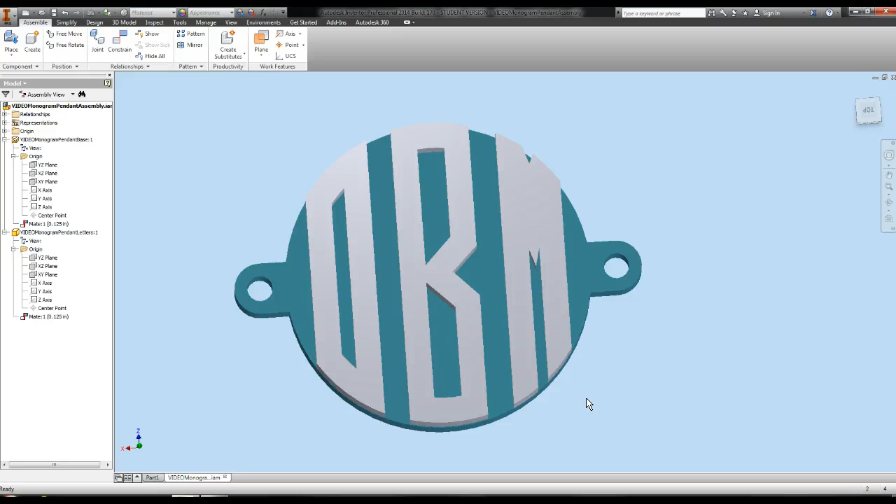My name is Danny, and today I'm going to be showing you how to make the letters for this monogram pendant piece. And what I'm actually going to do is just show you how to make the first letter D here and how to set up the proportions for these letters, and not do all three, because I think after I show you the first one, it's really just about playing with the line work.

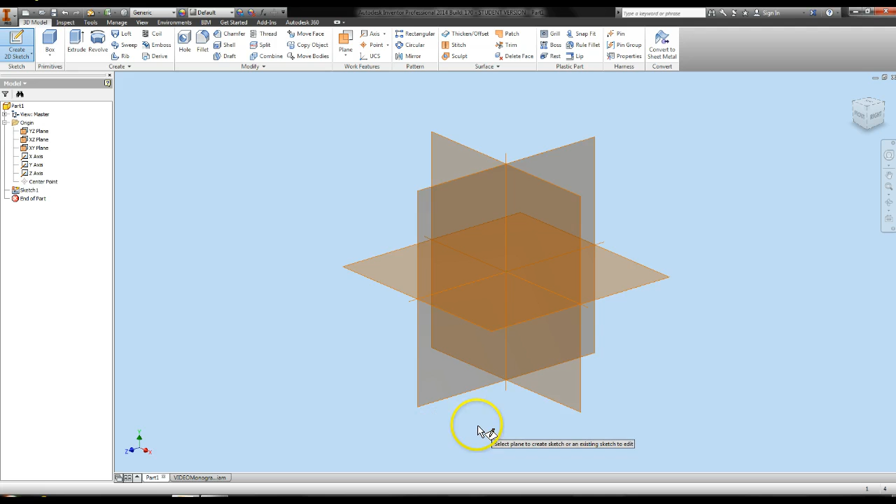So I already went ahead and opened up a new standard part. And then I'm going to create a 2D sketch, and I want to make sure it's on the same plane that I made my circular base on, which was the front plane for me, but whatever plane you used is what you're going to want to go with.

And then I want to create a circle as a construction line that represents this circular base here, so that I have a reference, because as you can see, these letters fit perfectly around the edges of the circle. And then I'm also going to create an inner circle as a reference, because that's what this edge here and here follow, so that we get this uniform thickness throughout all of the letters.

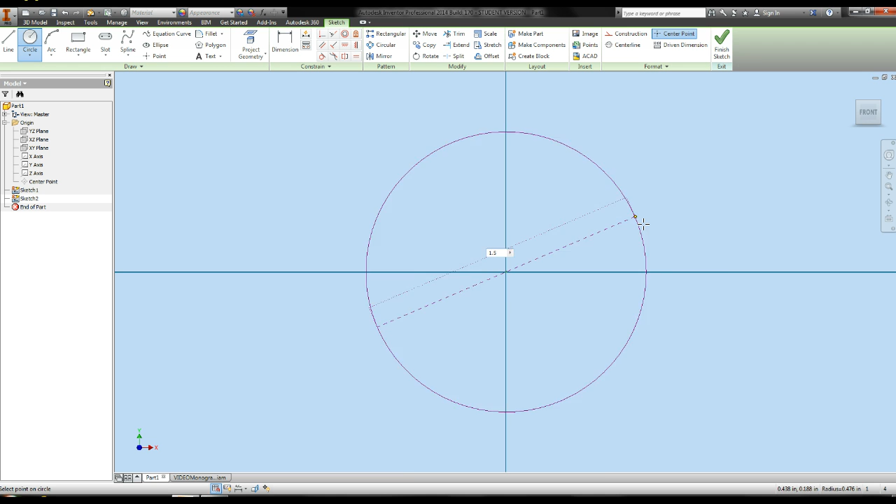So what I'm going to do is first make the outer circle, which if you watched the video on how to make the base, you'll know to be 1.5 inches. I had selected circle center point and selected the origin, and now I'm just dragging out and typing in 1.5 and just press enter. Then I'm gonna zoom out so you can see that entire thing there. And then I'm gonna press escape to get out of the circle feature, and I wanna offset this inward.

So to offset, you go up to modify and you just left click offset once. And then you select the shape that you'd like to offset, so I'm gonna select the circle. You don't have to hold down a left click, you just have to left click that circle once and then move your mouse. And I'm just going to move it in, not to any specific place, because I'm going to dimension that anyways. So I'm going to press escape since I'm done offsetting, and I'm going to dimension those.

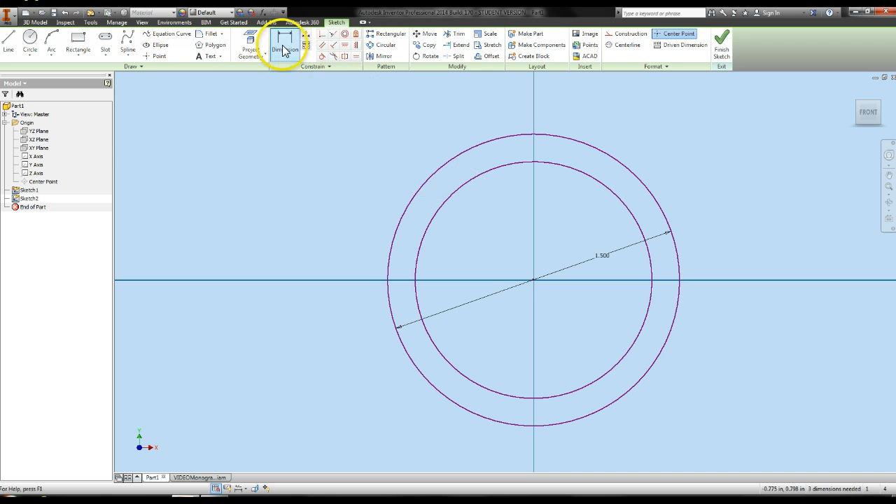So I'm going to click dimension, click the outer circle, click the inner circle, and as you can see, it knows that I'm trying to dimension the distance between those two. So the distance between the two circles is going to be 0.125, just so that we can use some standard fractions. So now we're going to escape out of the dimension, which I already did, and then we're going to make both of these construction lines, since they're not actually a part of the part we're creating.

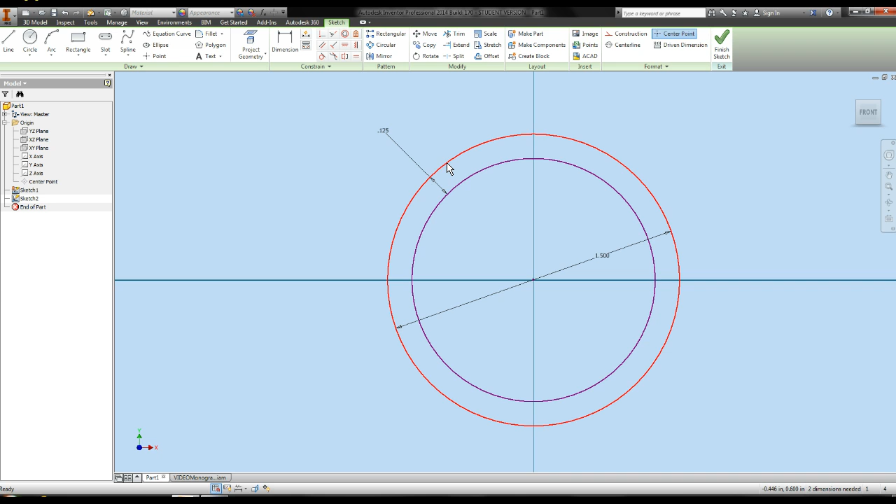So I'm just going to hover over the outside circle, and as you can see, it's going to highlight red. You're going to want to right click that once and then select construction by left clicking, and then we're just going to repeat that with the inner circle. I want to make that a construction and then press escape and then make this one a construction. So you can't just do it all in one go.

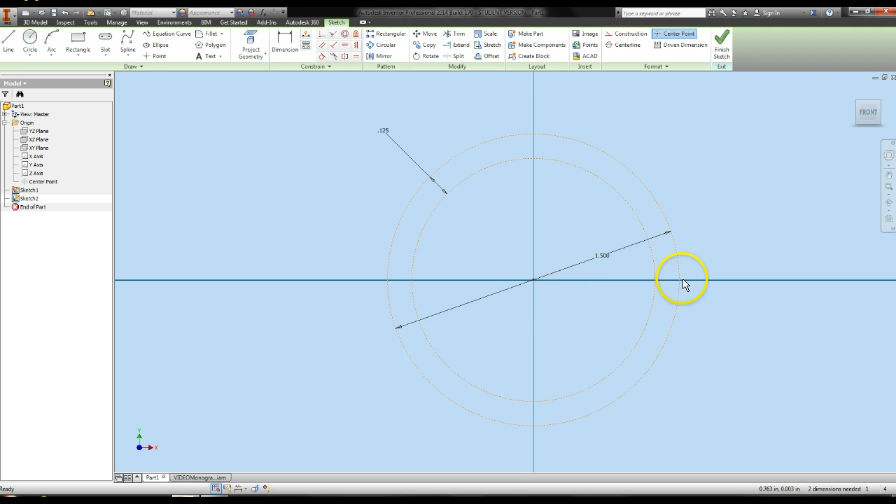So now we have two construction lines, and we're going to create some vertical construction lines to split the width of this circle into three equal pieces in terms of the width that we're allowing for those letters. So since this is a 1.5 diameter for the outer circle, we're going to create vertical lines at the x coordinates of 0.25 and negative 0.25, because that's what's going to give us that equal width.

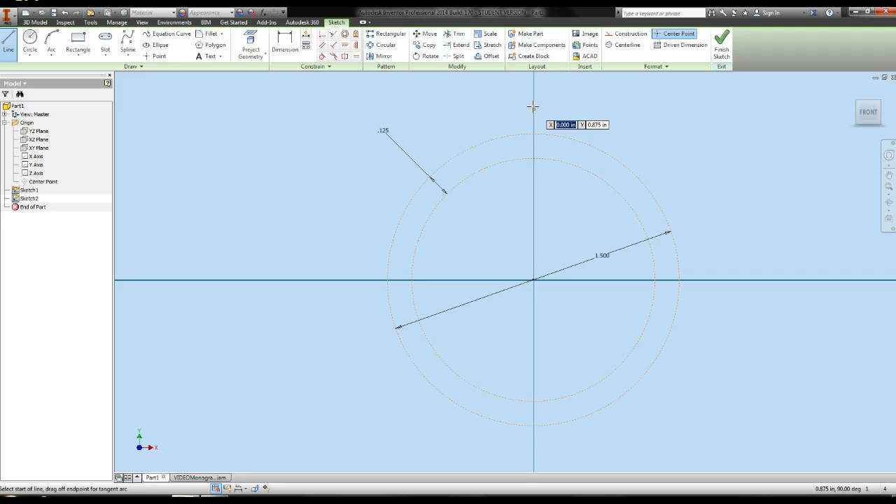So I'm hovering over the origin, and I want these vertical lines to come up out of the circle and just slice through like that. So I'm hovering up here. As you can see, the x-coordinate's at 0, and I'm just going to press tab and type in 0.25 and press enter. And as you can see, it splits that up for me. And sorry, I'm zooming out. And I want that to be a 90-degree angle there, and then just bring it down somewhere, it doesn't really matter, past the edge of the circle on the other side.

And then you're going to press escape and do the same thing, hover over here, and then press tab and make it minus 0.25. And again, just drag down, have the 90-degree angle, and there you go, and press escape. And again, we want to make these construction lines, so I'm going to right click, select construction, press escape, right click, construction, escape. Okay, so now we have these three equal portions.

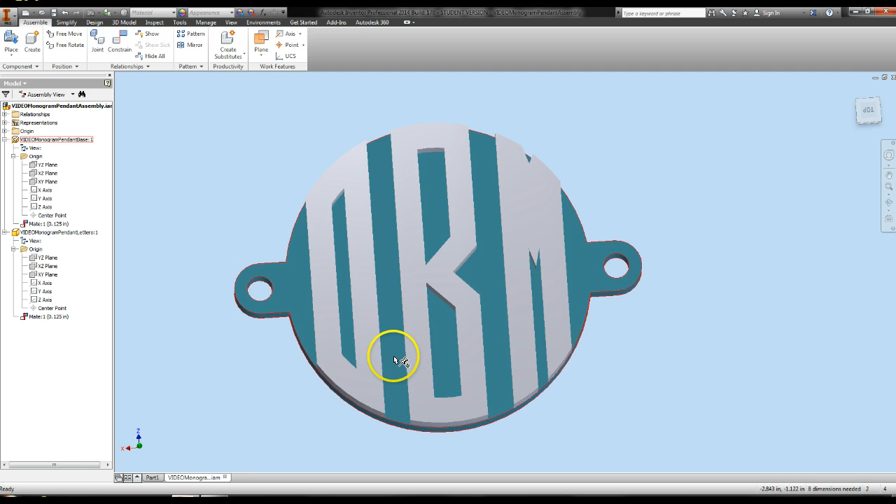And now we're going to work on making the D. So the D is going to go in this section here. But as you can see, these letters don't touch. There's still a gap, and so we also want to create that kind of gap there. So these construction lines aren't exactly where the edges of all of your letters are going to be going.

And so to start the letter D, we're going to start by making the side that goes down closest to this construction line on the left. So what I'm going to do is select the line function, and I want this edge to be 1/16 to the left of my construction line. So I'm going to go on to this construction line here and then tab in, and since we're in the negative direction, we're going to subtract that, minus 1/16.

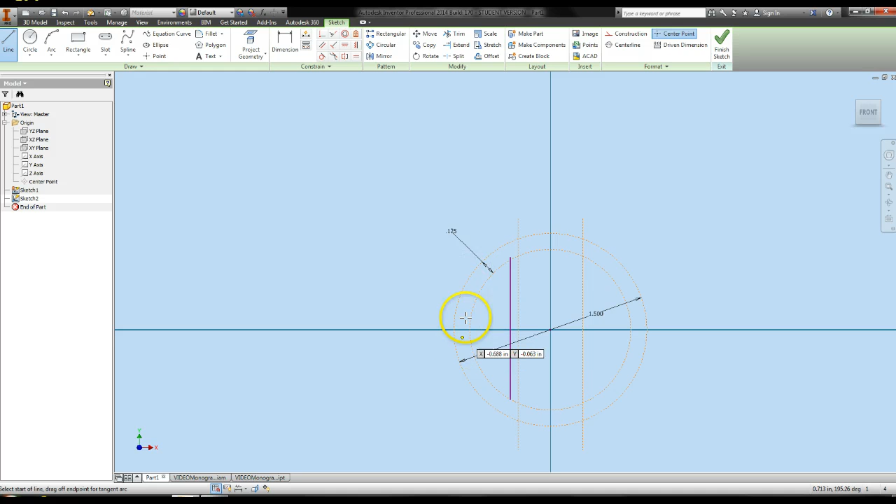So since we're going to add 1/16 on the other side before starting the B, it's going to give that thickness of 0.125. So I'm going to connect that to the lower circle, and then I want to make this left edge tangent to this inner circle, connecting 2 points of the outer circle.

As you can see, those dotted lines are showing up to tell me that I'm straight above that edge. I'm going to go down to this outer circle, and I'm going to press escape. And I want this line to extend all the way out, so I'm going to go up to this modify box, select extend, and then select here, and as you can see, it knows that's where I want it to go to. And then I'm going to extend the bottom. I'm going to press escape to get out of the extend function.

And now I want to create two arcs connecting both of these. So I'm going to select 3-point arc, and for 3-point arc you select the two ends of the arc first, which is why I like it for this purpose, and then you give it the bend. So I'm going to hover over here on this left line and left click once. I'm also going to go over that right line, left click once, and then it'll pull you to fit to that outer circle. I'm going to select OK by left clicking and repeat that process on the bottom as well. And as you can see, we're getting that outline of the D. I'm going to press escape.

So now we want to create the inner lines. And again, we want a thickness of 0.125. So I'm going to make a line. I'm going to hover over this outer line. As you can see, the X coordinate is coming up, and I'm going to press tab and add 0.125 to that. Plus 0.125 and press enter. And then connect that to the bottom line, and then hover over this line. It gives me that X coordinate, and again I'm going to extend those in a minute so that they go to that inner circle, and I'm going to select there and subtract 0.125 and press enter.

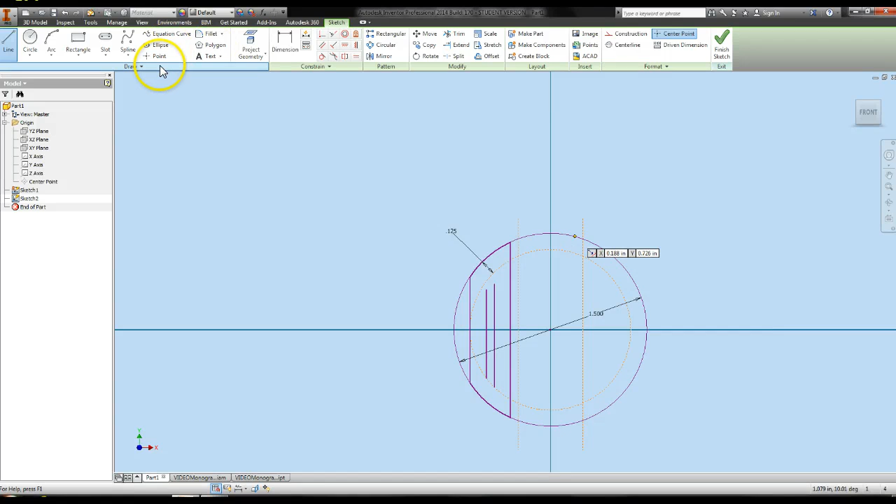So the thing about making these letters is it's not very hard in the features you're using. It's just getting all of these dimensions and proportions right so that it looks uniform and aesthetically pleasing. So I'm going to press escape, and I'm going to extend these lines. And they're both at the bottom there, so I'm going to press escape because I don't want to extend anymore. And then I'm going to do the same thing with the arcs as I did to the outside. So I'm going to select this endpoint and this endpoint, and it's going to automatically want me to match the arc of that circle. Select that endpoint, and there we are.

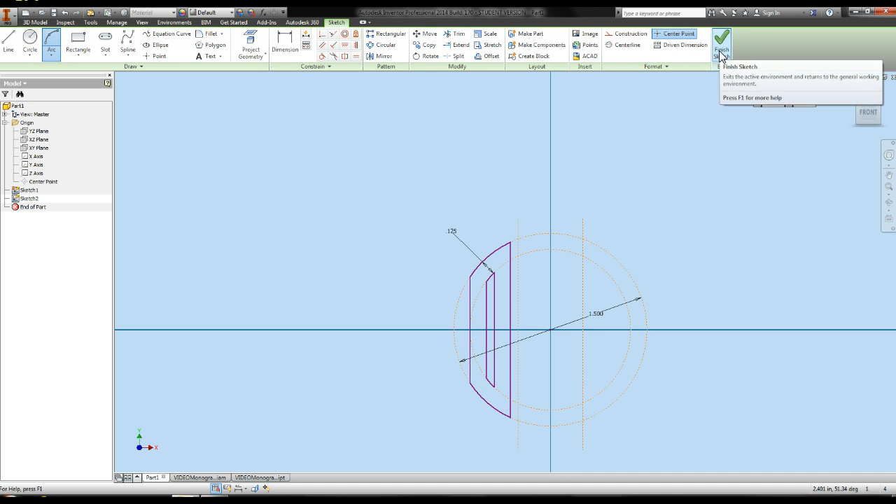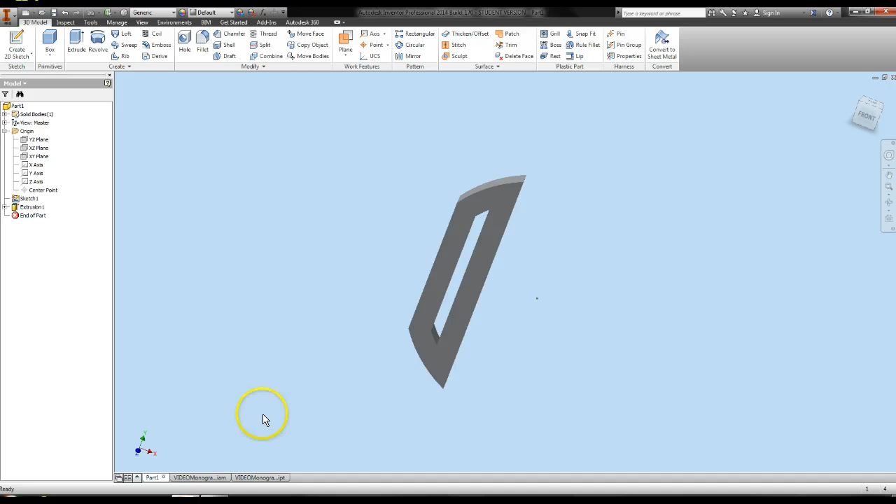So you have your D now. What you're going to want to do is go through and make the rest of your letters, and then trim those construction lines if you want to, but you could just leave them as well. So I'm going to finish my sketch for this and show you how to extrude it. If you remember, for the base we extruded it backwards, so you're going to want to extrude this forwards, but we only want 0.125. So I'm going to type in 0.125, make sure it's on this forward option, and press enter. So now you have one of the letters, and you can go through and make the rest of them.